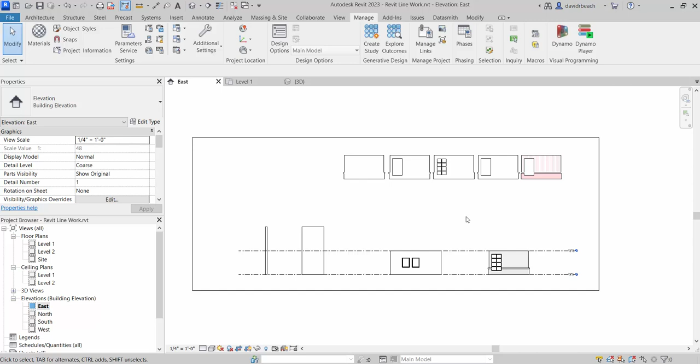So a couple of things we're going to cover. First, just looking at Revit to do some basic line work, some basic kind of drawings inside of the software. And this is just two-dimensional line work.

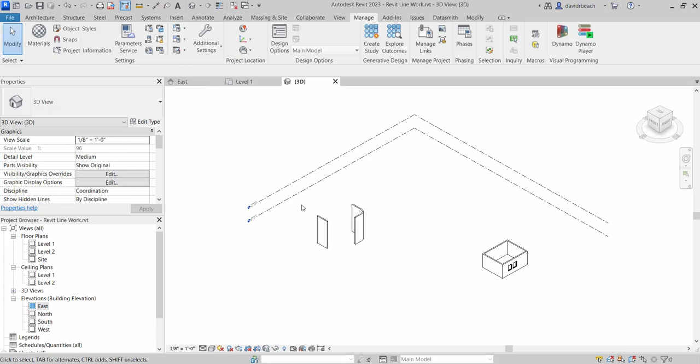Okay, this is a model of an elevation. Granted, it's a very bad model of a fairly poor elevation, but just kind of looking at how we can convert either this type of file that's starting to come together or a group of two-dimensional lines showing up in my elevation here.

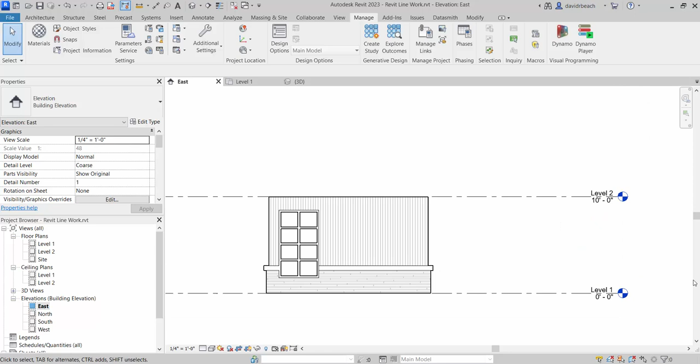These are just detail lines. Into things that we can start sending through the laser cutter and cut the lines. So first, the traditional kind of mode of take on this is that we have a three-dimensional model and we need to turn those into laser cut files.

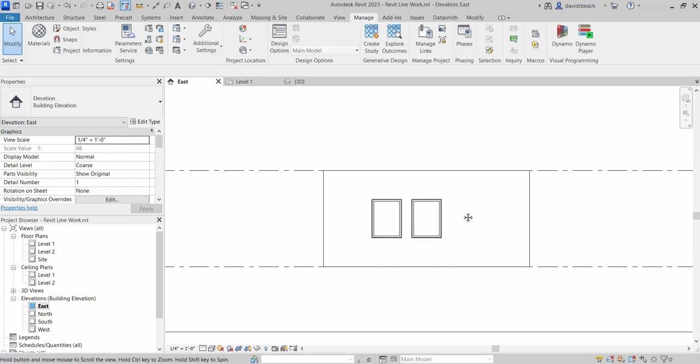Okay, so typically what I would do on something like this is I would start tracing these things out really quickly with a new line style and start building a series of layers that I can cut and glue together to form basically my physical model out of chipboard or museum board or something like that off of the laser cutter. So in this particular case, what we're going to do is come to manage additional settings and line styles.

In this list, we need to add, what I typically do is add two new categories. So I'm going to click new and call the first one laser cut.

And I'm going to turn this into super bright green. Okay, and two things that we like to do. We like the green, that's typically our cut line. I like the green lines for use on screen because they really jump off of the white background. It's an easy color to trace with. So I'm going to say okay to that.

I'm going to add one more new layer. We'll call this laser engrave. And so the engraving gets us things like, if I want a detail on the surface of something, sort of, you can see it just the corner of it here, like maybe a horizontal brick pattern or vertical siding pattern, something like that. A different color will allow us to say, okay, this is going to be an engrave, this is going to be a cut.

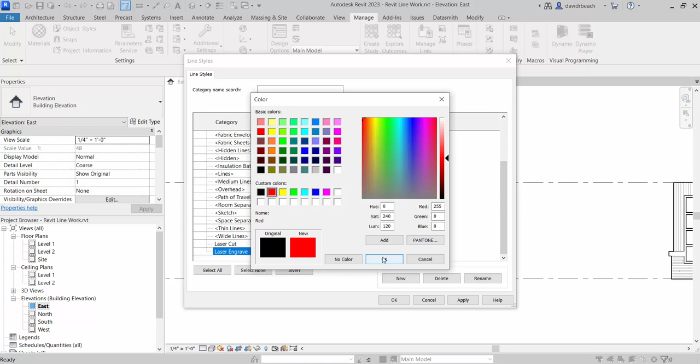And for our system, we like to use red. Again, visually speaking, that red has the tendency to go to the background a little bit, so we're actually getting a little sense of those colors as they might apply to how they're going to play out on a physical model with the laser cutter.

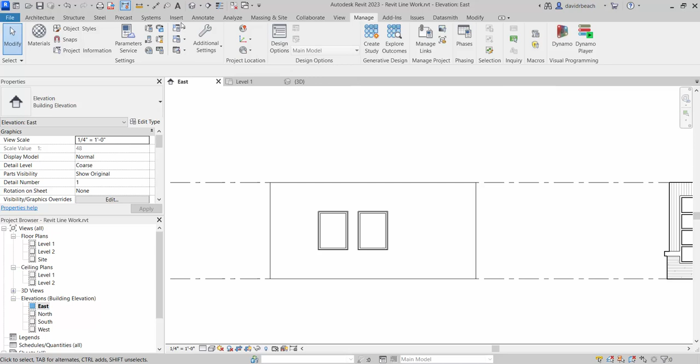So going over a three-dimensional model. So again, you can see that these are walls. These are a little tricky sometimes to convert to laser lines. And I've seen some processes in automating that once it's sort of turned into something two-dimensional. Still haven't seen anything that I like as much as just really quickly tracing things out.

So what I typically do with this is go to annotate, detail lines. I'm going to come down to my laser cut line type that I just made from the manage additional setting line styles, right? So annotate detail lines and laser cut.

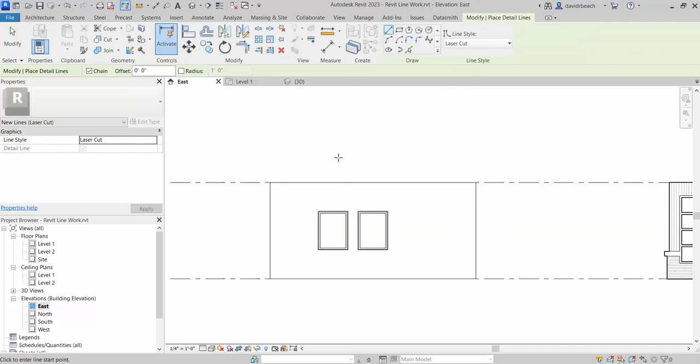So those are going to show up as bright green. I'm simply going to box out the overall, and I'm going to box out my windows. So pretty simple to quickly trace those as my first layer.

I can use the tab key to select all of my detail lines and simply move those up to start sort of a new row of basically the templates that I want to cut and create. And I can do the same thing with my windows.

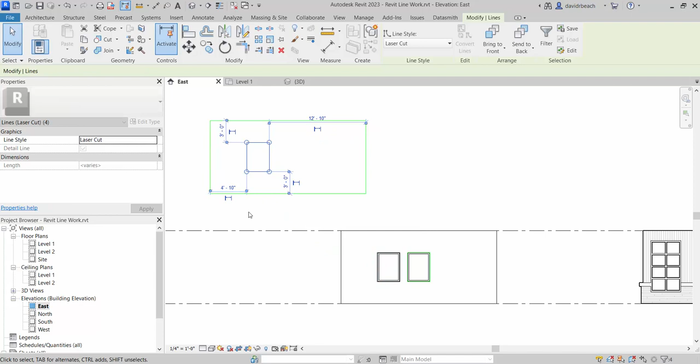So I'm just going to use my move and move corner to corner so those lock into the exact same place. Move that one, corner to corner.

Sometimes when you get something really, really complicated, a lot of glass, a lot of details in the elevation, it's a little bit trickier to do that than just sort of 3 steps to move those green lines off of this elevation so I can see sort of clearly what I'm wanting to cut. So in that particular case, often I'll find myself using the hide command.

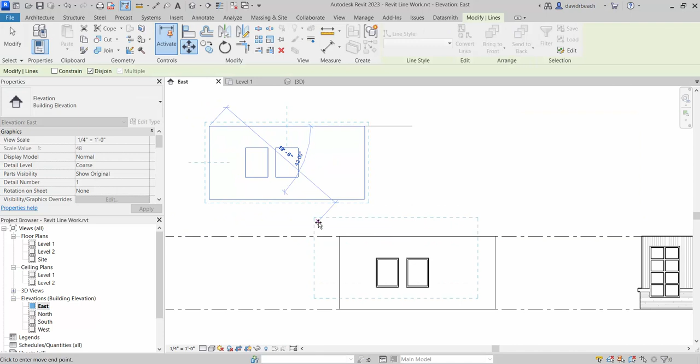So if I just move all that stuff back in place, one of the things that you can do is simply select a detail line and go to your temporary hide and isolate and say isolate category. Now everything is hidden, all the three-dimensional walls, windows, that kind of stuff. And then I can just sort of move that up.

I can run reset, and now I also have those backed up and away. So if I'm working with the 3D model, that's kind of the approach.

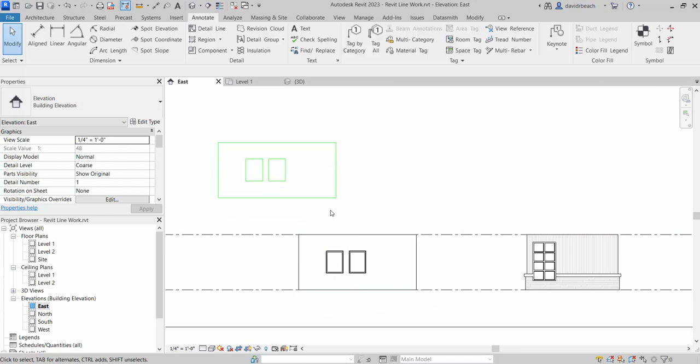Now if I have two-dimensional line work like this, I've just been sketching out an elevation that I want to work with. In the particular project I'm working on, we need a series of layers to build up a slightly more complicated, deeper wall. So let's look at how to start building that as a system.

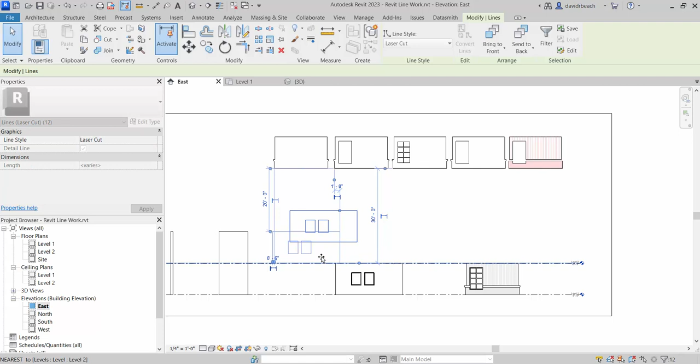The first thing I would do is, I don't want to lose this file. This was drawn out using detail lines, both thin, medium, and wide lines, and I want to start copying some of these over.

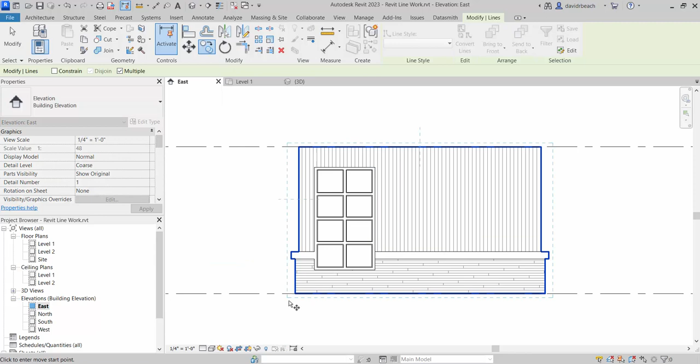I'm going to hover over an outside edge, use my tab key to select that entire chain, and run copy. Let's just copy this up, starting a brand new row. Once I have that up, I'm going to use the tab key again, select all of my lines, and change those.

From wide lines to my laser cut lines. Super happy with that. I'm going to copy this over for my next layer, and now I want to add in an overall cut for that window.

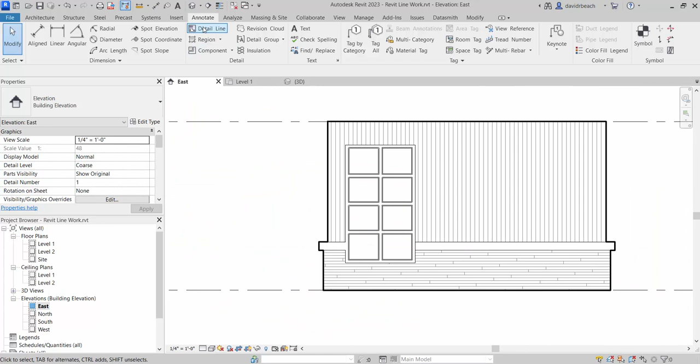So I'm simply going to trace that in with detail lines, laser cut, for that entire rectangle. Again, I can use my tab key to select that chain of lines, and copy that in place, using the top left corner to match location to location.

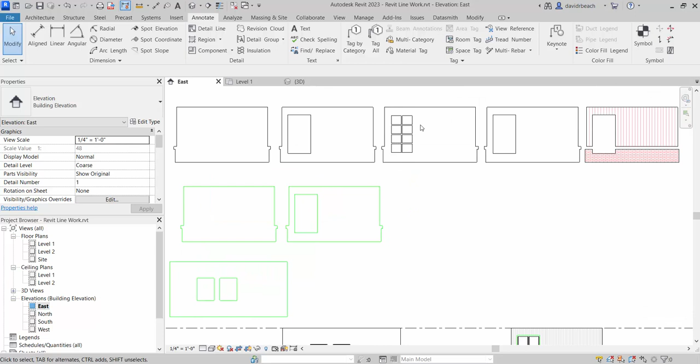So I have that, and then let's add in these mullions. My next layer would be this overall - so I'm going to select this group again, not move, but copy.

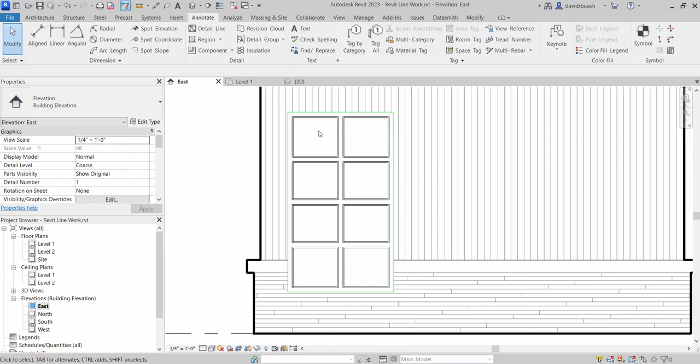I want to trace out just the mullion detail. Essentially I have an opening, then I have the mullion details. To do something like that, same trick - let's go to detail lines and draw in each of these elements. I'm going to quickly select that set of lines.

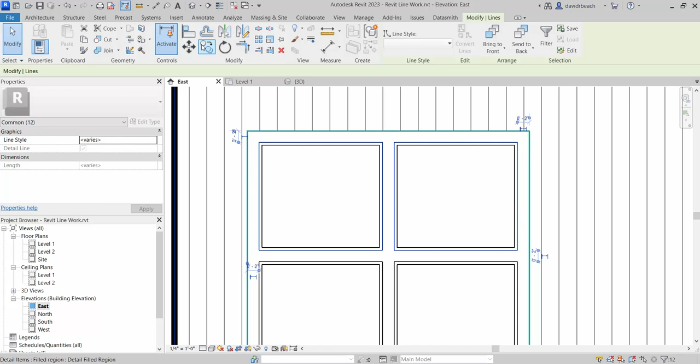Then I can copy those lines from the top corner of the window to - well, top corner of the wrong window there, but let's just move those over to the correct piece. There we go. And I know I've got 4 of those going down.

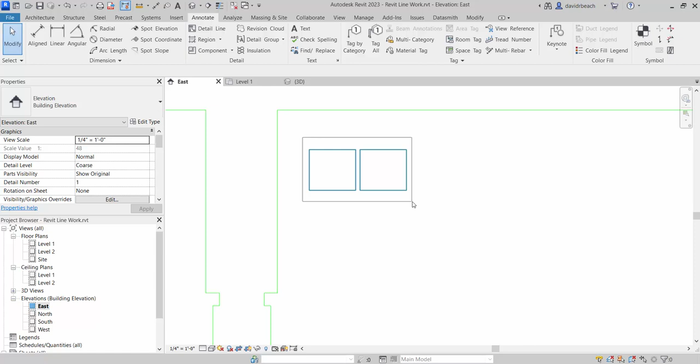So we'll just run a copy on those. I know my mullions were about that thick - I want to spare you all watching me just draw on this video. Oh, I did the last two wrong. Undo. There we go.

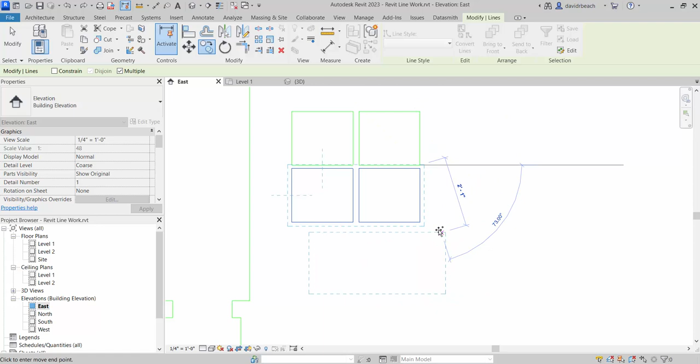Copy. Move, move - let's see if I got that roughly correct. Yeah, absolutely, so that's going to fit inside that window really nicely.

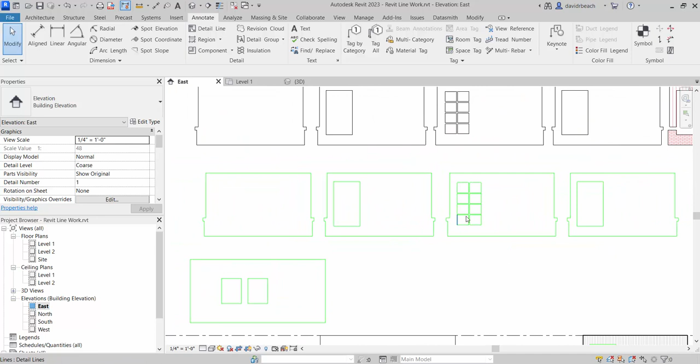Then I would take this group, let's go from here to here. So essentially, if I'm starting to think of this as a series of things that are going to be cut on the laser, I have my backmost layer, an opening, my window mullions, and then another opening. To build this last part, where I might want to do some laser engraving.

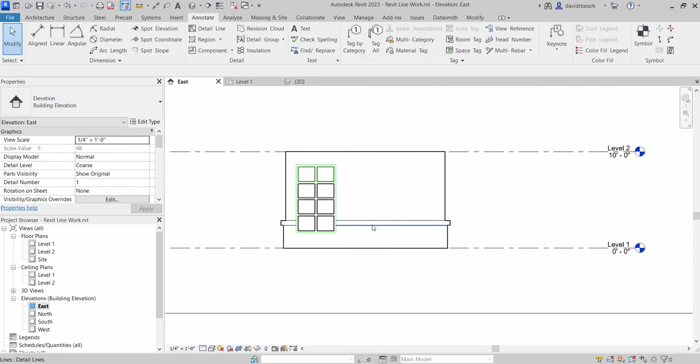First of all, I've got the top and bottom, and then this little water table detail. What I'd start with is, let's just copy this layer over one more time, this group of lines over one more time.

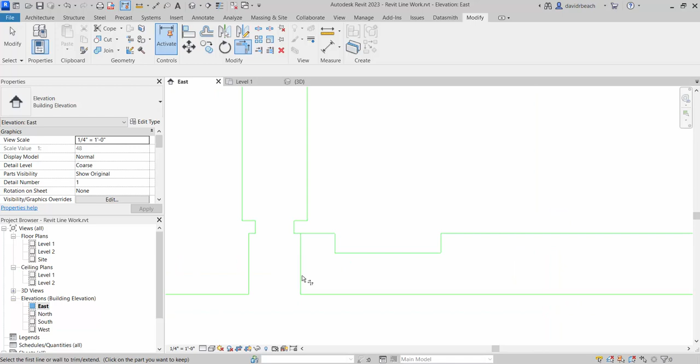And I can really quickly trim these pieces together. So let's trim that to that, let's trim this to that, and then trim one more time here and here, and here and here. At this point I can get rid of my upper lines - don't need those. So this is just creating this base piece.

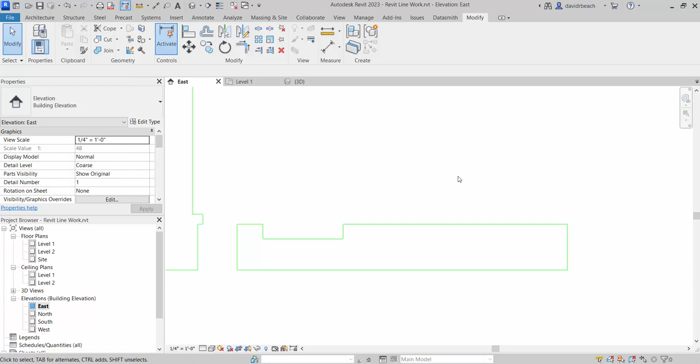But I want to put a series of lines on here to create a texture, an engraving texture on the cutter, on our laser cutter. So to do that, I'm going to come in and I've got two options.

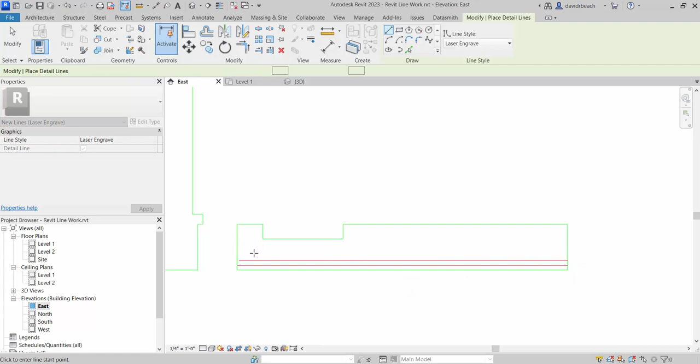I can go annotate, detail line, and at times we need to be able to draw in an engraving line, a line at a time, right? So I can come in and start putting in, like, every 3 inches a series of lines, which is a reasonable thing to do, I suppose.

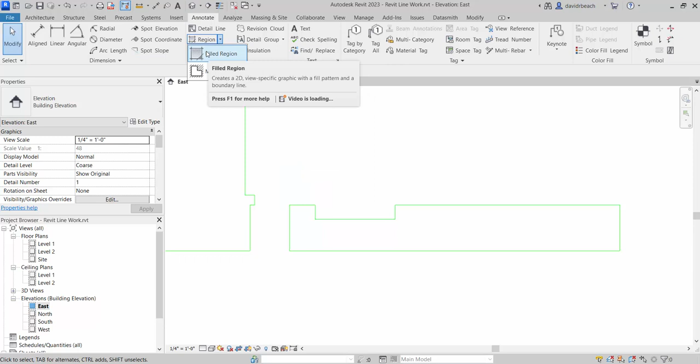But often, rather than doing lines one at a time, it's more beneficial to come in and do an entire filled region. So to work with that, I'm just going to come up to region, filled region, and I already have a hatch pattern that I want to use, which is brick.

But let's take a look really quickly at those kinds of patterns we can build. If I do edit type, right here with brick, under the foreground fill pattern, I can click these three dots, and you'll see there are two different hatch pattern types: drafting and model. The drafting hatch patterns are going to vary how they're applied based off of your architectural scale.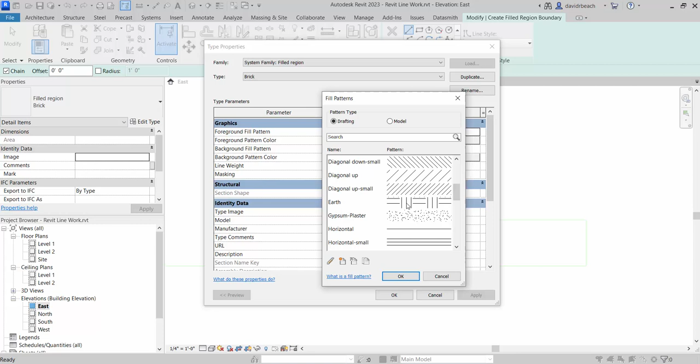In other words, if I think about underneath my sections, if I have an earth pattern - so the symbol for that is where I'm cutting through earth - at a quarter inch, it's going to represent itself at a different scale than at an eighth inch or sixteenth inch.

My model patterns are locked into their size and dimension. So no matter what, if I have a 24 inch by 24 inch ceiling tile, at every scale, it's going to represent itself as a 24 inch by 24 inch ceiling tile. So it's really important to note the difference on those things, okay?

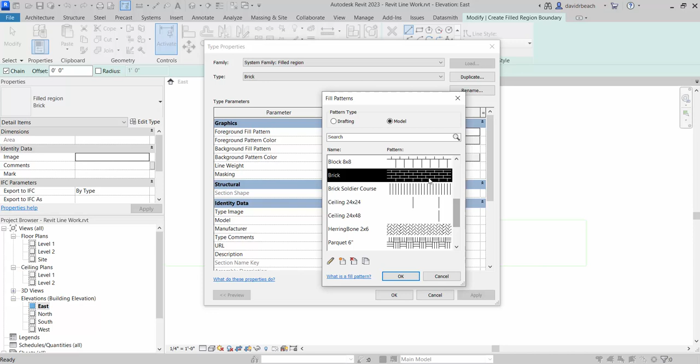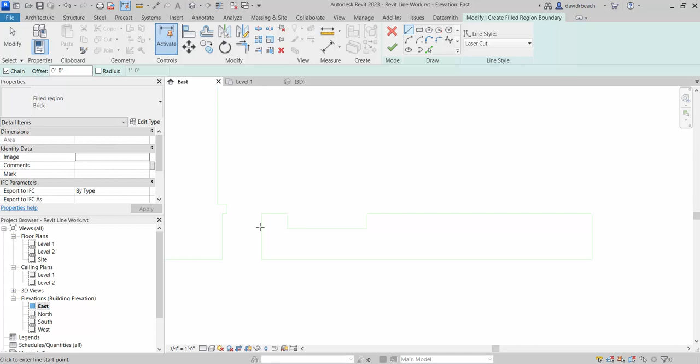So I'm just going to use, for this first pass, just brick. If you'll notice, I've set my foreground pattern color to the same color as my laser engrave lines. I can say OK to that, and then OK, and I am simply going to trace around with my laser cut lines. So essentially I'll be able to delete that first set of laser lines here in just a second, that basic shape.

I can green checkbox, and now I have a hatch pattern. Let's make sure I select it. That is infilled with brick. And so no matter how I change that, that hatch pattern is going to constantly fill.

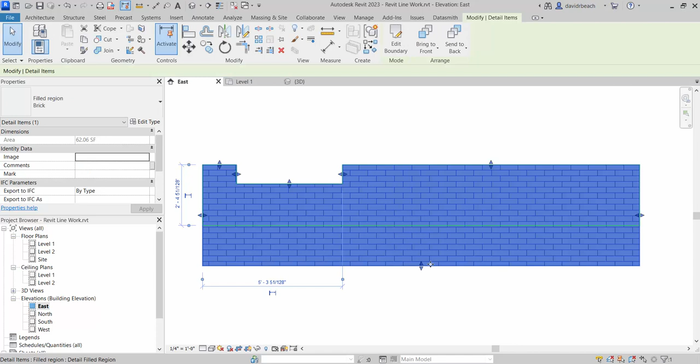Now I don't want the laser cutter to cut lines twice. So essentially I have a line for the hatch pattern forming the perimeter, and then I have another line that I traced. We want to get rid of those initial lines. So I'm going to select that chain and delete it. I still have my line to cut the edge, and then I have this brick pattern to be engraved.

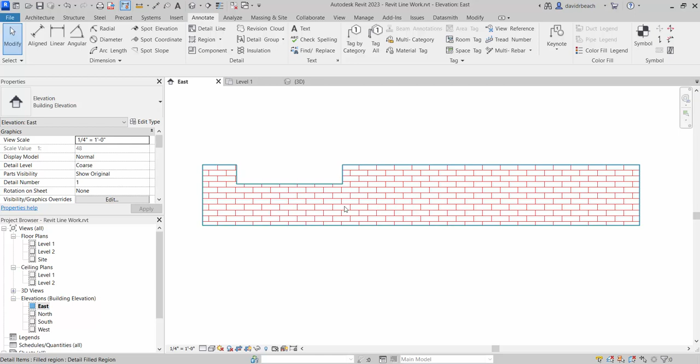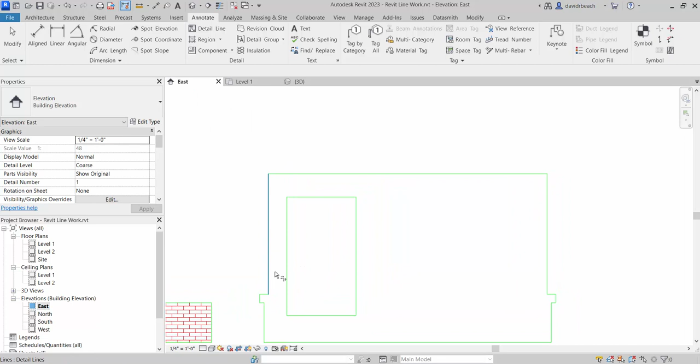So let's do that trick one more time, but over this top piece. So we'll cut this, or copy this one more time. Let's bring that over. Let's slide my crop box over, and let's build a top piece, but let's use a vertical line, sort of a more customized hatch pattern that we set up. So I'm going to go to Modify, Trim, and we'll trim around this window again. And we'll trim a water table piece back to the top.

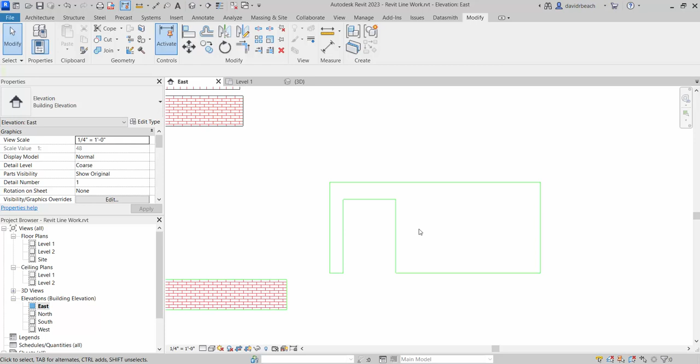And now I want to infill this same kind of hatch pattern. So I'm going to go to Annotate, Filled Region, and this time I'm going to go Edit Type, and let's duplicate, and let's call this Vertical Siding. I want to keep my foreground pattern color as red, because again, I'm primarily interested in this driving the laser cutter. I'm going to switch from brick.

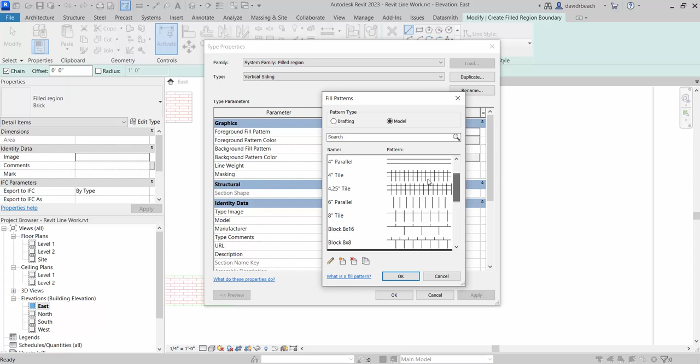I'm going to stay in my model lines here, but I'm going to select, let's start with, just so I can walk you through everything, let's start with a 4-inch parallel line. And I am going to duplicate that fill pattern. And so let's call it vertical 4-inch siding.

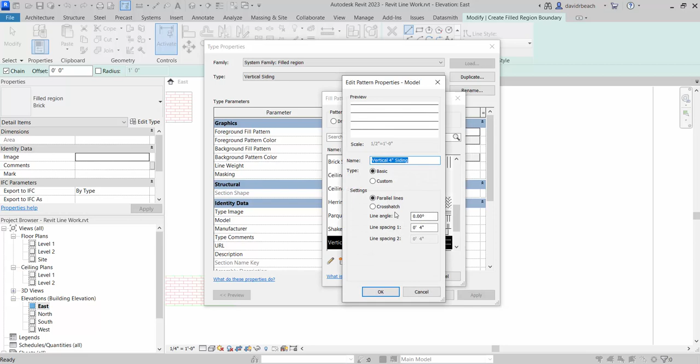So I've got that, except I didn't actually make it vertical. It's still running horizontal. So let's go edit that fill pattern. And let's change our parallel lines to be running at 90 degrees. So their spacing is 4 inches across. The rotation is 90 degrees to get those running vertical. I can now say okie dokie to that, okay, and okay.

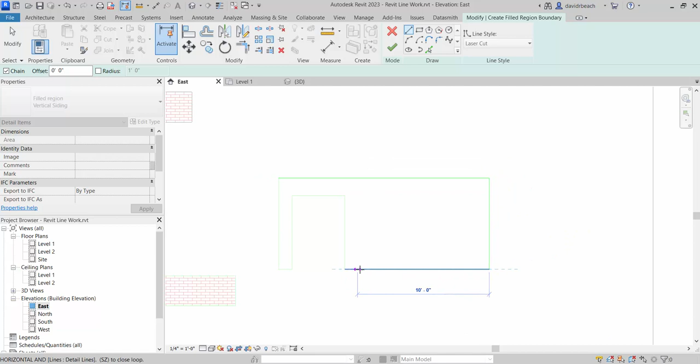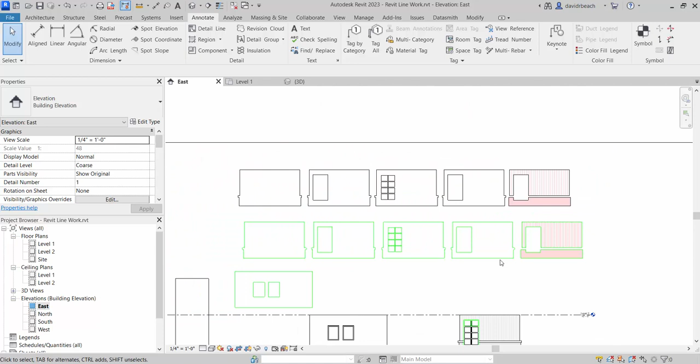Now it's the same process as last time. We are going to trace around the perimeter using our laser cut line. Green checkbox. And now I have that infill pattern. I can delete my chain of lines underneath and then just sort of stack those two things together. Just like that. So this is now a set of lines that are ready to build this wall.

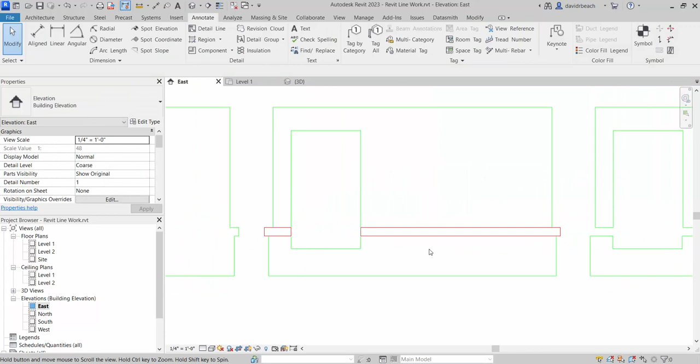I suppose I could do one more set just for fun to build up this sort of ledge piece here. So let's do a quick set of lines like that and another quick set of lines like this. And let's group those together. Move. Let's put them just underneath like that. And let's grab this set. Move.

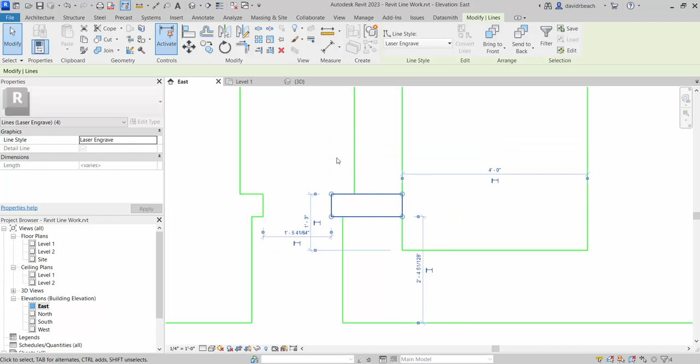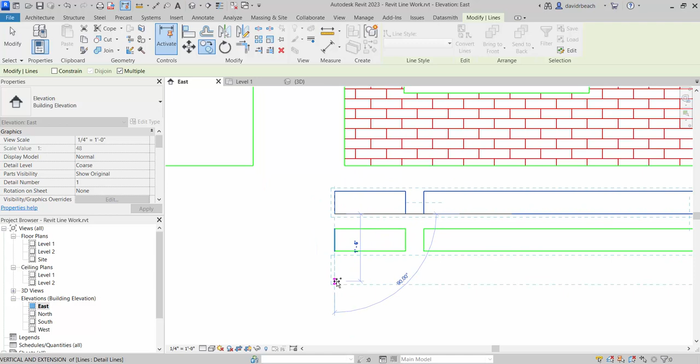Those are cut lines. So I'm going to change their line type to cut. And I need two of them. So I'm stacking out one more layer higher than this. So copy. Let's do it two more. Something like that. So I have those essentially will be stacking up on top of that layer. So this is all ready to go, to send these to our laser cutter.

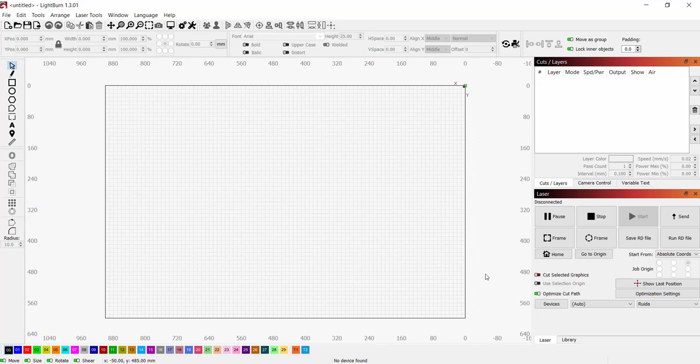So our laser cutting software, what's driving the laser cutter, is called Lightburn. Great piece of software, thrilled with it actually, mainly because it is going to import. Our primary mode is importing PDF files. And what's great about that is we don't necessarily have to only use Revit. We can use AutoCAD, Illustrator, Photoshop, whatever is going to generate a vector line. It's going to be very easy to export that to a PDF and import it into Lightburn.

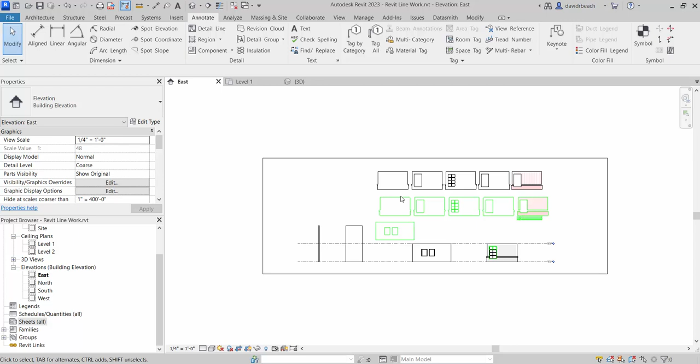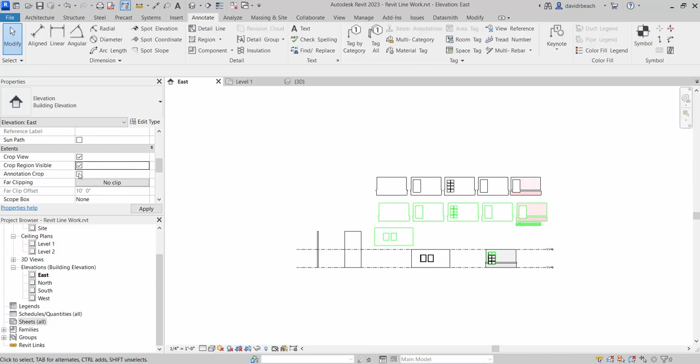So our process specifically from Revit, we need to do a couple of things. Let's delete this so that we can go through it from the very beginning. So the first thing that I want to do is in my elevation view, I want to remove anything extra. So my three-dimensional models, things that I don't want to cut, other patterns that I've built, I want to remove all of those. So with nothing selected in my view, I'm setting all these up in my east elevation view. With nothing selected in my view, I want to make sure these three boxes right here are turned on for me. So this is crop view, crop region, and annotation crop. This gives me a box around everything that I can use these grips to isolate only the objects that I want cut.

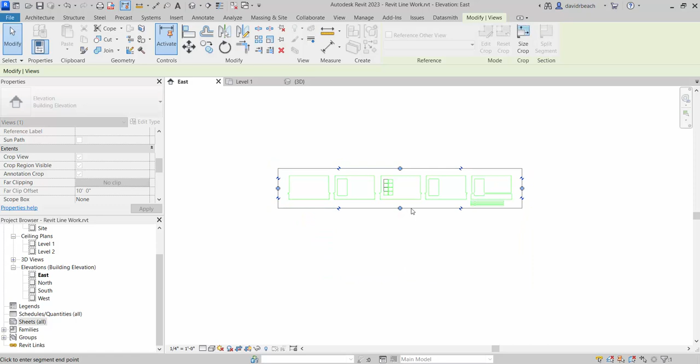Just like that. Next, I want to check my scale. The project I'm teaching this for, we are building 1/4 inch scale models. So make sure we are no longer at 1/8 inch, which is the default using the architectural template. Change that to 1/4 inch.

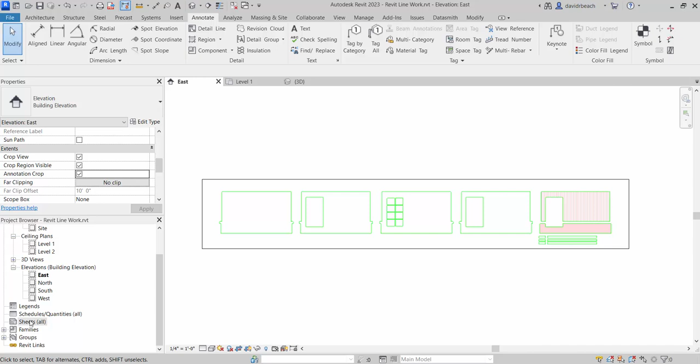Now we are ready to set up a sheet to lay out all of our different elevations, all of our different views, whatever we're getting ready to cut. So under sheets, I'm going to right click and say new sheet, then load. We have a specific sheet set up for our laser with the correct parameters, called Revit Laser Sheet.rfa, a Revit family. We select that and say open, then select Revit Laser Sheet from my list of sheets and say OK.

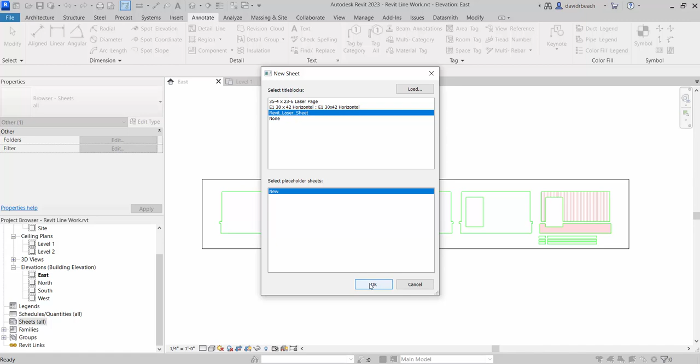This essentially is close to a 24 by 36. It is slightly cropped in because that basically is the edge that our laser can get to within a 24 by 36 sheet.

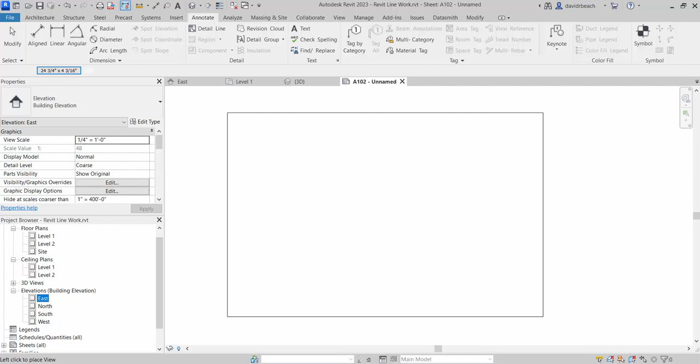What we need to do next is click on the drawings I want to import, which in this case is the cropped view of my east elevation. I can simply drag and drop and place that. Our material in the laser is going to be oriented based off of this top left corner, so I can sneak things up reasonably close to that corner.

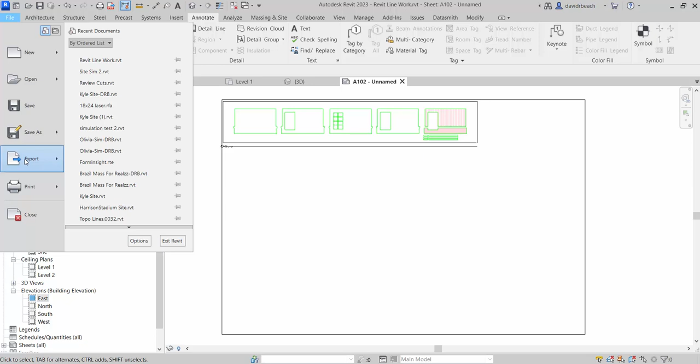Now I'm ready to print this as a PDF file. I'm going to go File, Print. We really like to use CutePDF — it's a great PDF writer, super small, super simple to use, and it has our default architectural page sizes in it. Highly suggest that, it's excellent to use. We are going to go to Setup.

We need to check Center. We need to turn on Zoom to 100% because we need to make sure this is locked in at 1/4 inch scale, and we are going to change from letter to architecture D. Arc D is 24 by 36. So we'll say OK, and then we'll run our preview.

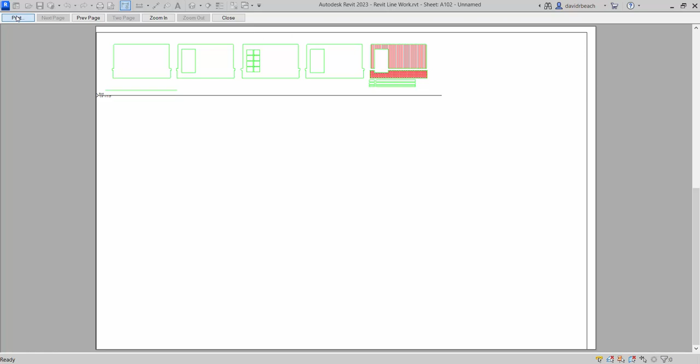A couple of things are a little bit off, so let's go back and check that one time. I should see our slightly smaller page from the RFA file, the Revit laser page, sitting centered into that. Let's go back to Print and Setup and see where we're at. For some reason, that radio button likes to jump from center to offset, so let's change that back to center and say OK.

Preview one more time, and now I'm centered. You can see I have the extent that the laser can go inside of a 24 by 36 page, which is exactly what I want. So now we can hit print, and I'm just going to save this as a PDF file, writing it right to my desktop, and we'll call it Revit Line Work 4.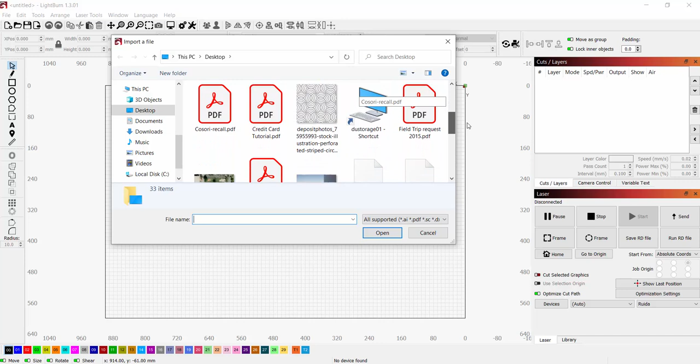Inside of Lightburn, we'll go File, Import, and find the Revit Line Work 4 file. You'll notice it does come in rotated — it's an XY translation issue, don't know exactly what it is, but it's that easy to fix the rotation.

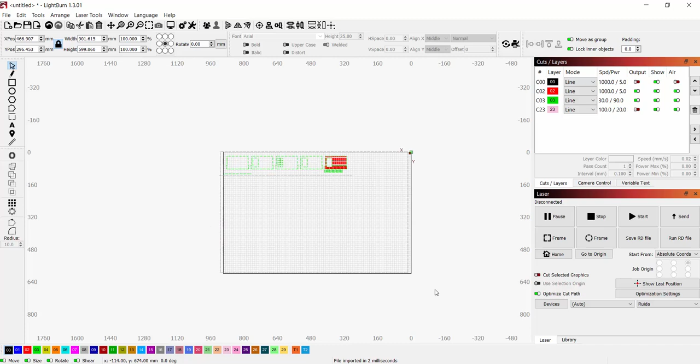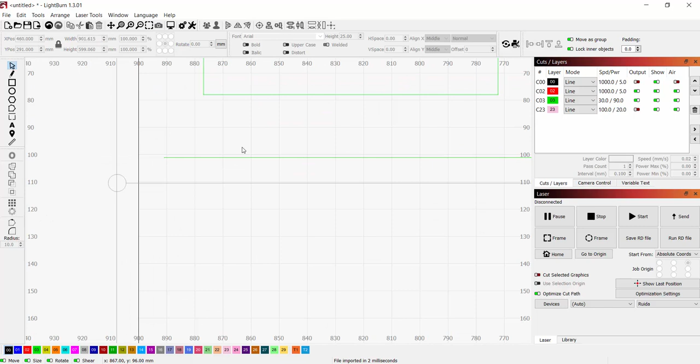You're just using the grip. It will rotate freely unless you use the shift key, and then it locks into an incremental rotation, which is perfect. Again, we can left click to select everything, or left click and drag a selection box around everything. This middle grip is going to move our line work around, and again we want to align things in that top right corner. Looks like I have one rogue line — can probably just select it and delete it. Really like that feature in Lightburn, it's fabulous, just being able to go in and modify.

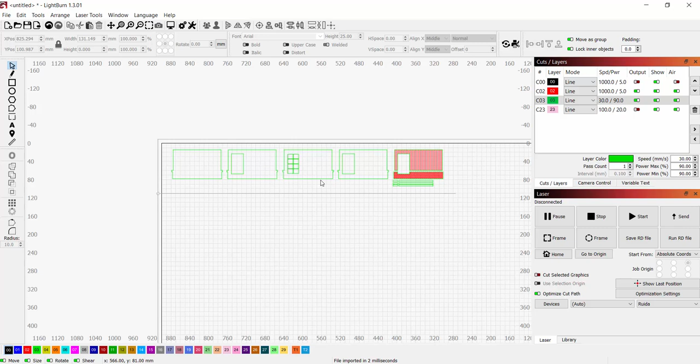So again, colors create layers in Lightburn. You'll notice any of the black lines, like the title block — this is why we're changing things from black lines to red and green. I want to ignore the output on the black lines.

So that's just turning that off, no output there. The red lines we want to engrave, so I'm going to use 1,000 millimeters per second as my speed, 5% of the laser power. The green lines we want to cut, so I've got those set to 30 millimeters per second on my speed, 90% of the laser power. There's this sort of roguish pink line in there someplace — don't know what that is, don't care, just turned off its output.

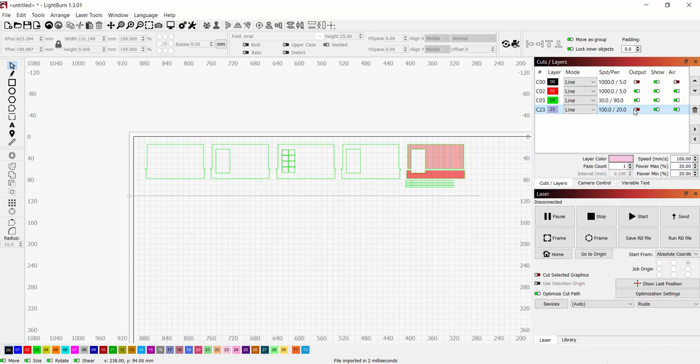At this point in time, we're going to select all of our lines and hit the send button. I'm not actually connected to the laser right now, so that is where essentially everything with the hardware on the laser takes over to complete your cuts. Easy peasy.